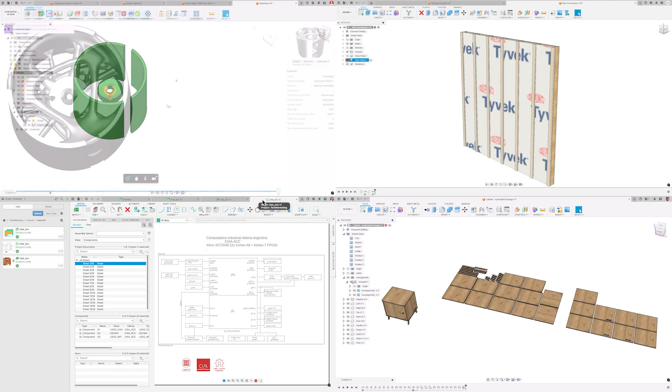Welcome to the What's New in Autodesk Fusion for September video. In this update, we're excited to showcase the latest features and enhancements our team has been working on for the past couple months. Let's dive in and explore what's new.

First up, we've personalized the user experience based on your intent of using the product. You can choose from 3 core personas: design, ECAD, or manufacturing. Each of these provides tailored recommendations for tasks that are related to that specific role. This empowers new users with ways to work smarter and achieve their goals faster.

Let your eyeballs rejoice! We've heard your feedback and have made it bearable to launch your favorite design and make tool for those late nights when inspiration suddenly strikes. We'll admit, the previous loading screen was a bit intense, but we see you, and your eyes will see better as well with the new launch experience.

The active design and hub names are now displayed in the application title bar, which is visible while the application is active, as well as in the taskbar preview. This makes it easier to know you're working on the right data for the right teams.

For those participating in our Insider program, the application now has a dedicated splash screen, title bar, loading screen, login, and icon. This makes it easier to distinguish between each version and quickly switch between testing and production environments.

Next up, data and collaboration. You likely work in teams, so getting everyone on the same page is critical. We've added some great functionality in this area to streamline the product development process and help make better decisions faster. Here are a few of our favorite highlights.

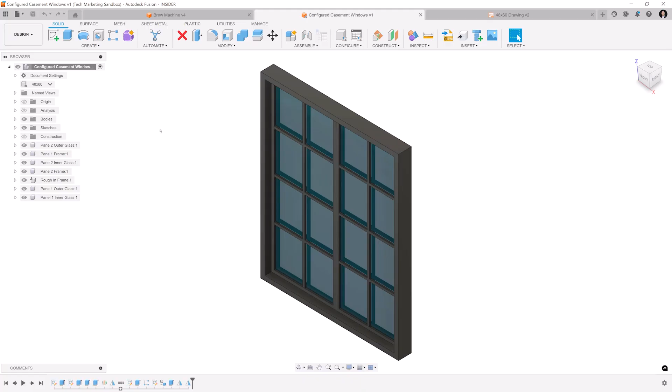In the design and drawing workspaces, users can now navigate to the project and folder location of the design or drawing in the data panel. When right-clicking on a design or drawing in the design or drawing tree, the Show in Location option has been added and opens the data panel, then navigates the user to the file location within the project of the folder structure. This will greatly save time finding data for projects that have a lot of components and files.

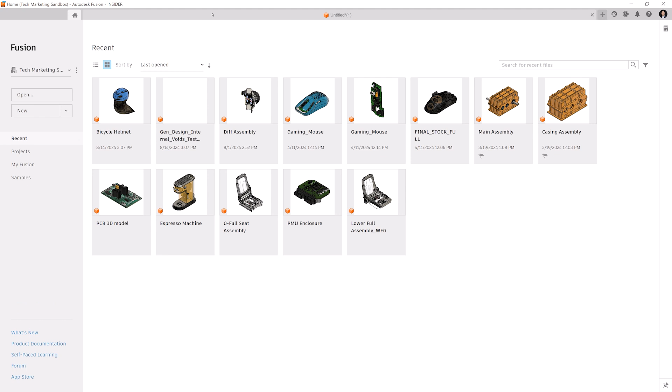In the Fusion Home tab, the user experience for handling file, folder, and project-related actions has been improved. It now takes into account the permissions of the user within a certain project and folder, and then shows only the available commands while keeping the others grayed out. When hovering over an unavailable action, the user is notified about the lack of permissions and to reach out to the administrator to adjust their role. This enhances security and makes collaboration more transparent.

Autodesk has been making some changes to the way we manage cloud data so that your projects will support future updates to your Fusion Hub. As a reminder, you can upgrade your Fusion single-user storage to take advantage of a fully featured Fusion Hub. You can initiate the upgrade process now by self-selecting the self-start process in Fusion. You'll be guided through a required in-product upgrade at a later date.

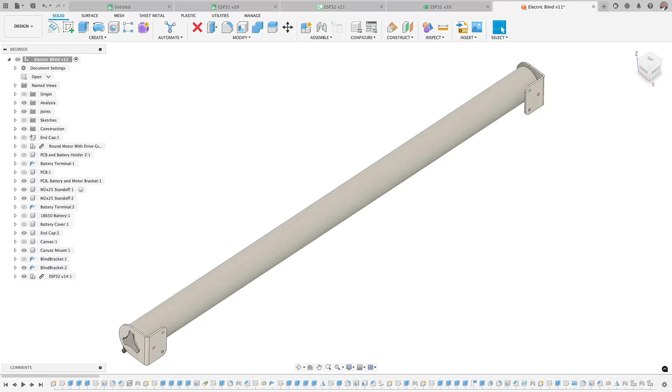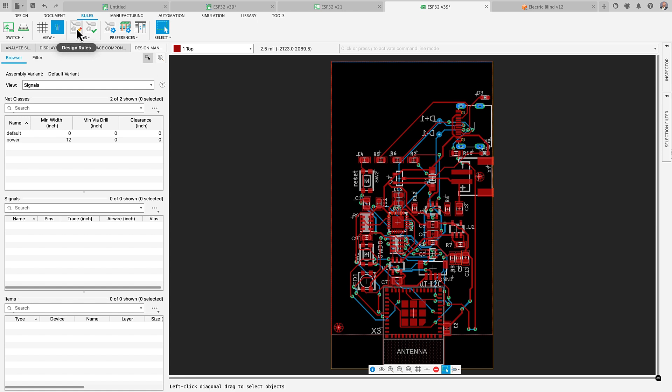The Fusion Electronics Workspace has introduced a new dimension to defining design constraints by empowering you with a wide range of scoped rules. For this work, instead of having a single global design rule preference, we have now divided it into 2 distinct categories: design preference and design rules. If you currently have DRC parameters in your current designs, don't worry, they are fully compatible with our new technique.

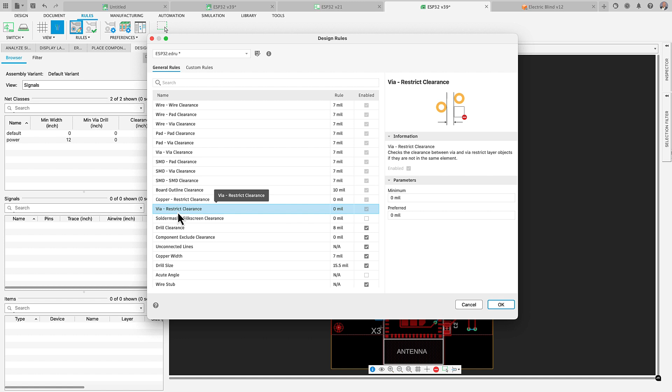Design preference will continue providing you access to global rules such as layer stackup, layer material and dielectric properties, annular ring values, and much more. Design rules will now offer you scoped capabilities. That way, you will be more in control of constraints on your board design. Notice that we have more general rules and custom rules.

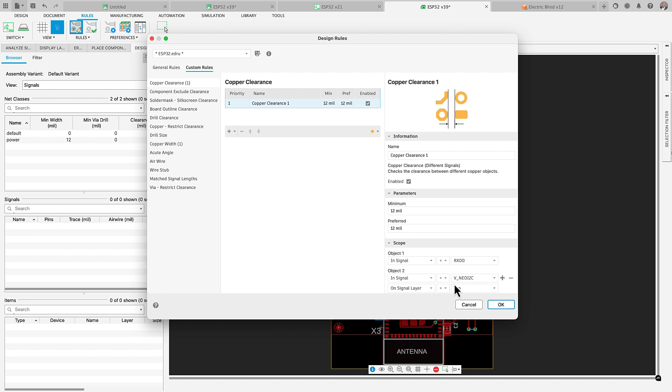In custom rules, you can now set up copper-to-copper clearance for a specific layer, a specific signal, or even better, both. Yes, you can set up a signal to follow my clearance rules on layer 2, which are different from those constraints on layer 1 due to signal integrity concerns. Try it out and discover that there is a lot more. This is more than just a DRC update. It's a game changer for PCB designers, making your work more precise and in control.

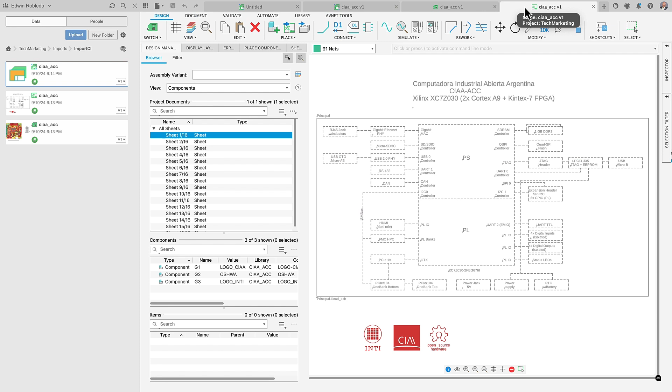We recognize that smooth teamwork is essential for progress, and we're thrilled to introduce our latest update with enhanced importing features. You now have the capability to directly import your electronic schematic files, PCB designs, and library files from KiCad into Fusion. This enables you to seamlessly continue your work from where you left off, but now with the added advantage of utilizing Fusion's comprehensive electromechanical platform, making your design workflow even easier than before.

Starting with this update, you can now import and export user parameters, offering significant benefits to many of our multi-user accounts in particular. This allows you to share valuable parameters between multiple Fusion documents and reduce that non-value added work of creating the common ones each design iteration.

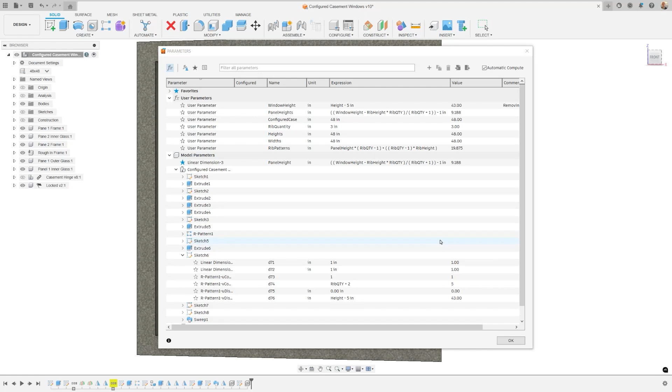Essentially, parameters are stored in an external table that you can import or export, but these parameters are not associatively linked with any specific design. This means that you can easily bring in a set of pre-populated default parameters for use.

When exporting, only user parameters populate this list, and you can edit the exported table using Excel or Notepad if needed. However, it's important to note that any changes to parameter values in the external table will not update existing designs upon re-import. Instead, a new parameter is created with the updated name. Additionally, you have the flexibility to select which parameters from your list you want to import.

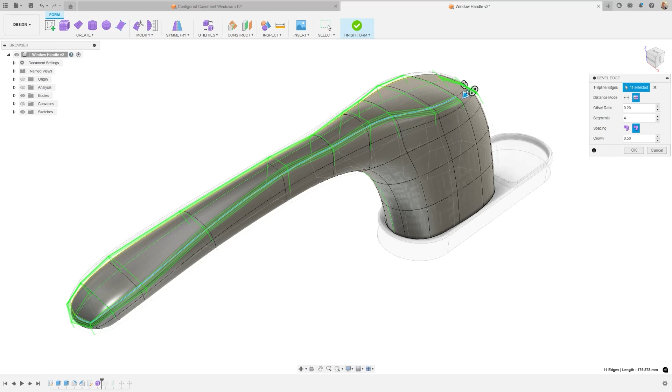This release, we wanted to pay a little attention to the form environment in Fusion. Creating T-splines is an incredible superpower of Fusion that not many people are familiar with. You now have enhanced control over the bevel command, allowing you to better define your component's design. One key improvement is the ability to specify an exact offset distance for the bevel, rather than a relative distance. This ensures a consistent bevel dimension along the entire edge, regardless of the size of the connecting faces.

Additionally, you can now define the crowning of the bevel, with a range from 0 to 2. A value of 0 creates a fully flat chamfer, while increasing the value results in a more convex profile.

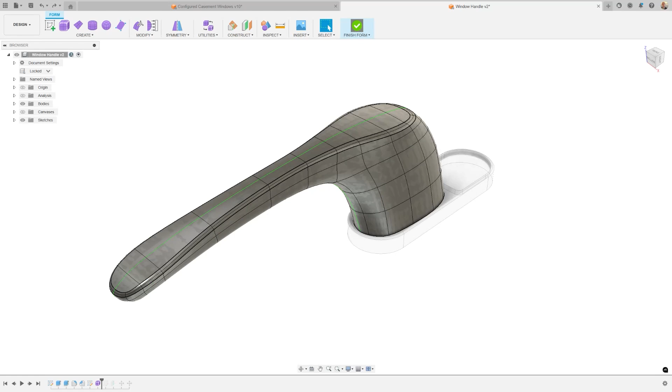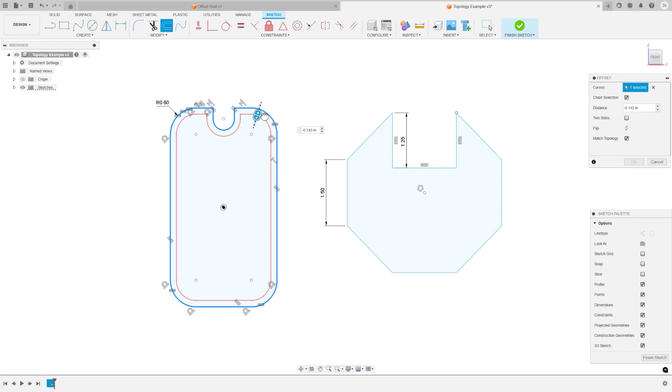We clustered a set of improvements to the offset sketching tool together. The match topology option helps you decide whether the offset created should be forced to match the topology of the parent curve. You can see how the offset limits itself in certain directions if it's unable to maintain curves and corners as expected. Offset now also retains constraints, so if you delete an element of an offset curve, the offset constraint automatically adjusts to maintain its connection to any remaining curves.

The two-sided offset option enables you to apply a two-directional offset from a central line. This makes it easier to create symmetrical designs, but you also have the option to edit those offsets to be asymmetrical later, as each offset behaves as an individual entity, allowing for separate editing or manual linking as needed.

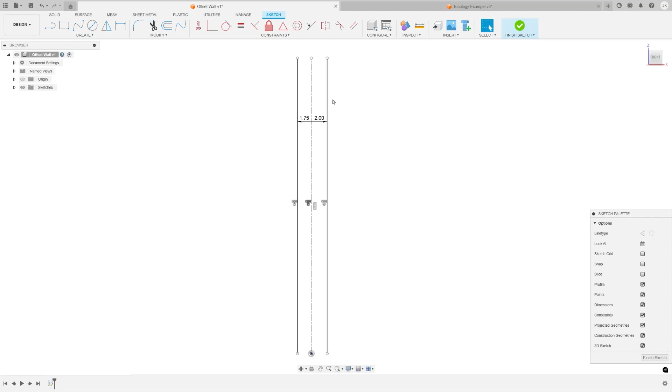The offset of an offset update allows you to create multiple offsets derived from an already offset line, something that previously wasn't possible. I'd also like to note that you should almost always use match topology, as it's dependent on each other, as shown here. This is how I created the set of offset wall component thicknesses that essentially build upon each other.

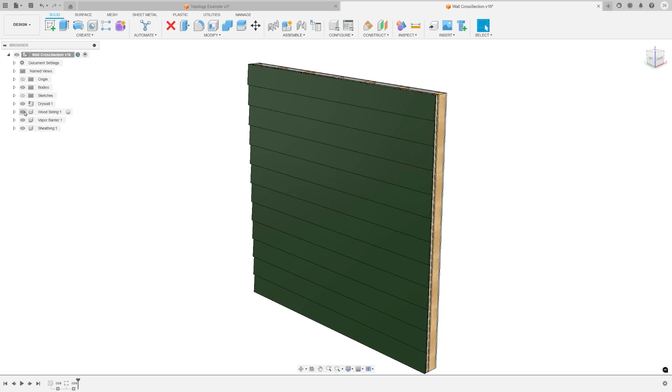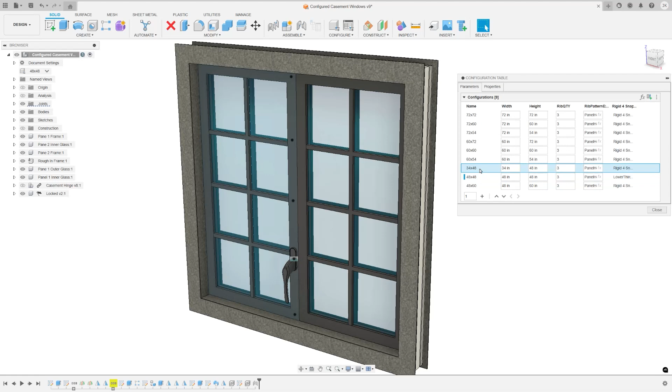Configuring joint snap locations and joint flipping offers you some greater control over the positioning of components in your configured assemblies. Users can now select multiple options for each snap location of a joint and name each option, allowing for flexible configurations such as a single location to many locations, many locations to a single location, and if you're feeling extra crazy, you can do many locations to many locations. We've also put a much requested update on the ability to choose whether a joint is flipped or not for each configuration.

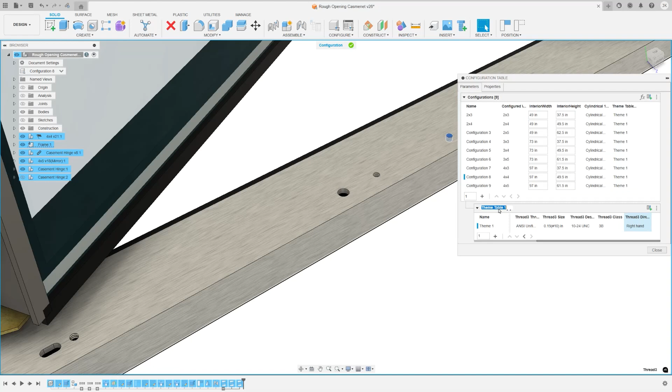Configuring thread features automatically changes the thread dimensions between configurations. This is the foundation for configuring all threads and holes throughout Fusion. For now, you can configure various thread options, including thread type, such as ISO metric, ACME screw, pipe, any of these, thread size, whether the thread is modeled, full length, left or right-handed, thread pitch designation, or class. This feature is particularly useful for creating components that can adapt to standard parts changing sizes, such as an adapter plate that adjusts to match the size of a motor, or for creating a standard part.

We've updated drawing automation once again. This update allows users to set default dimensioning strategies in their drawing templates. When you create or edit a drawing template, you can now choose a default dimensioning strategy for each sheet type in the automation settings. And as an added bonus, delimiter support, which allows users to specify whether a comma or full stop is used as the decimal delimiter in numbers. This feature enables users to customize their drawing settings to align with their own regional standards.

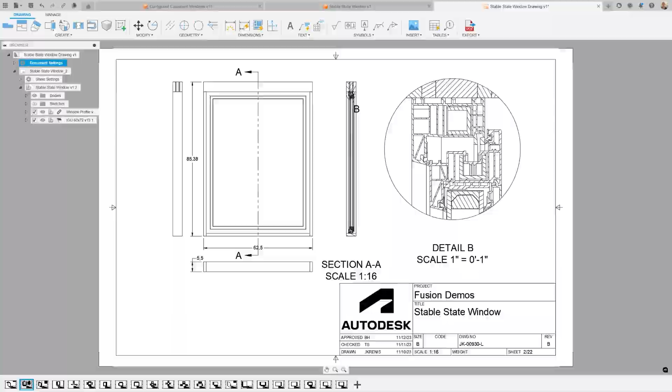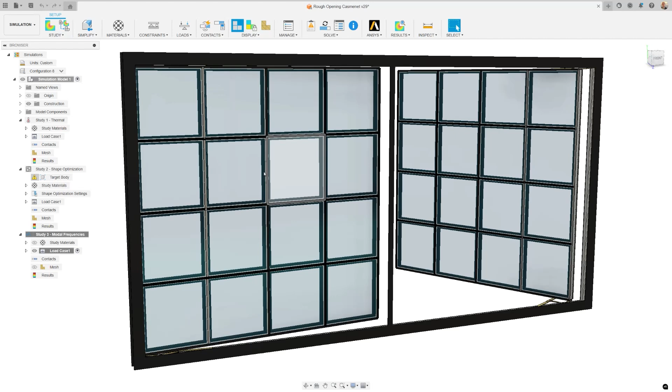We're introducing the new Copy Study feature for configured designs. This enhancement significantly improves configuration support for simulation and generative design, reducing repetitive tasks by allowing users to quickly copy setup information, such as boundary conditions, materials, contacts, and study settings, from one configuration to another. If any setup attributes are incompatible with the destination configuration, then they will be flagged for the user to action upon before running the study.

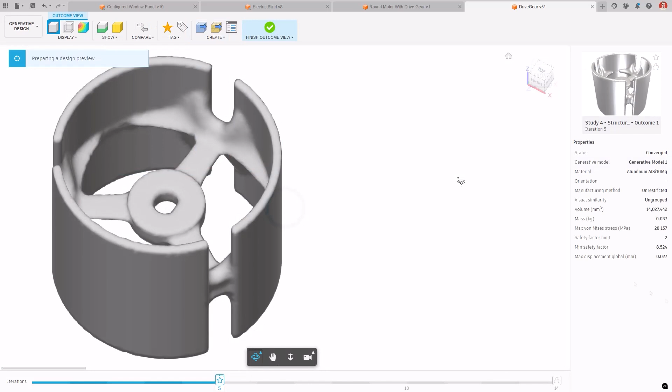Global loads in generative design allow for the support of both angular and linear global loads in your generative design setups. Global load represents forces acting on a mass across the entire study setup. Angular global loads account for forces on a mass undergoing angular acceleration or velocity, while linear global loads are for masses experiencing linear acceleration.

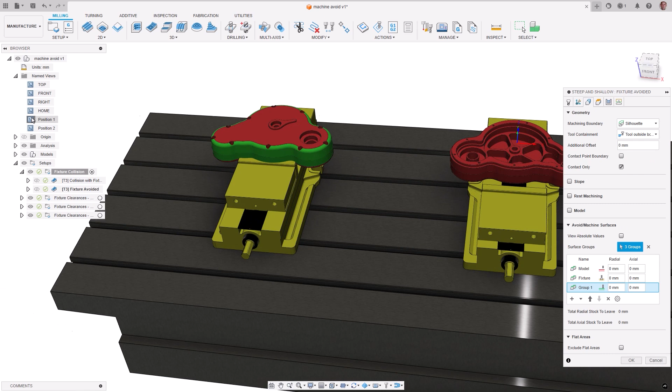Let's start manufacturing with the new Avoid Machine feature, which is my favorite in this release, as it gives more control to how you use surfaces in a toolpath. This replaces the previous Avoid Touch, which only allowed you to touch or avoid, and never at the same time.

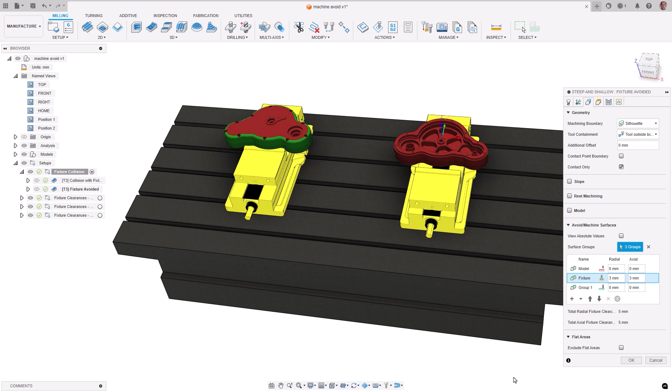This new approach allows you to group sets of surfaces together and apply an action of avoid, machine, gouge, or fixture to each group. Radial and axial clearances can now independently be set for each group as well, giving you even further control. This also aids in the issue of some toolpaths ignoring fixtures defined in the setup. Now, fixtures will be automatically added, marked in yellow, and avoided. Most 3D and multi-axis toolpaths support this new feature, except for rotary pocket, rotary contour, horizontal, and swarf.

Changes have been made to the toolpath dialog, making it easier to navigate by re-establishing the left to right workflow. This improvement will be especially noticed in multi-axis toolpaths, reducing the need to move back and forth across the tabs. The machining type is now available at the top of the first tab and can be set to 3, 4, or 5 axis, allowing you to set your intent up front about how you want to machine a part.

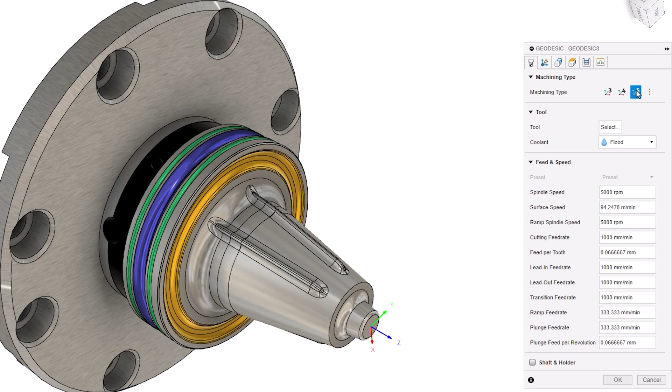The multi-axis tab has been moved to the second tab in the workflow, and additionally, the tool orientation has been moved from the geometry tab into the multi-axis tab. These changes will prevent cases where you must go to a later tab, set parameters, and then return to an earlier tab to make further adjustments, allowing for a more streamlined workflow.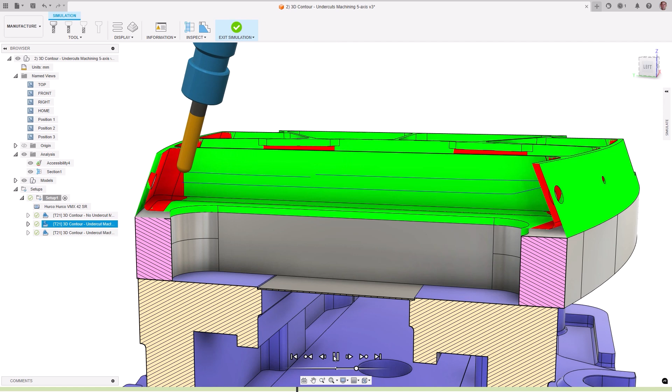The 3D contour toolpath has been enhanced, giving you the ability to now machine undercut regions. This new functionality is not readily apparent, as it is part of collision avoidance. By checking it on, the tool axis is adjusted to allow spherical tools such as a ball or lollipop end mill to reach into the undercut areas. It's worth mentioning that care should be taken when using this with boundaries, as the boundary defined may not entirely encapsulate the undercut area, resulting in a toolpath that is not complete.

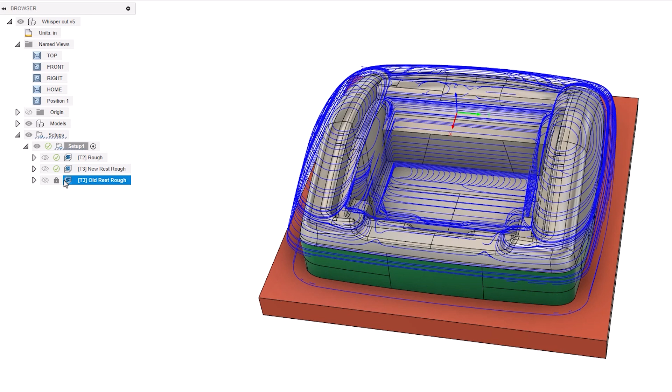Whisper cuts is the term typically used when the tool is cutting little to no material. These cuts not only increase the cycle time, but can also, in certain circumstances, potentially damage the tool. The algorithm for the 3D adaptive clearing toolpath has been enhanced to better identify and reduce these unnecessary cuts, leading to improved rest roughing toolpaths, which not only save you machining time, but are also safer for the tool.

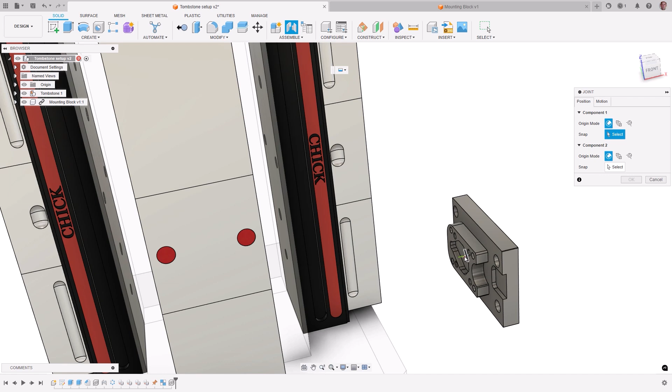CAM data previously was not accessible in a linked design that was imported, which meant that it was not possible to create an assembly of CAM programs. For example, to position a part in a vise or to combine pre-programmed parts together on a multi-part fixture. This functionality has been improved, allowing you to now reuse CAM setups and operations from linked designs.

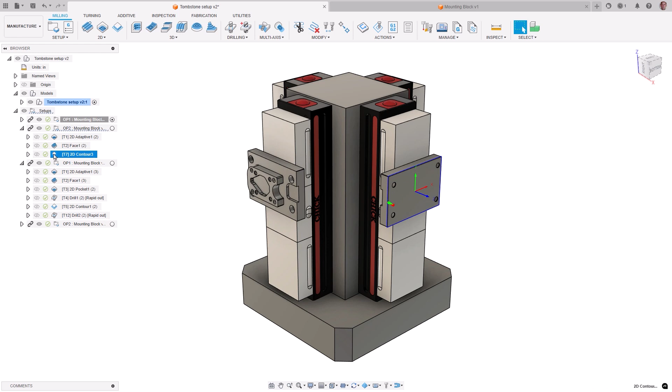The imported CAM data is read-only, but edits can be made to the workpiece coordinate system or tool orientation to refine how the toolpaths are applied to the new assembly. Setups or operations which are not required can be suppressed, and you can also break the link on the setups to gain full control of all toolpath modifications.

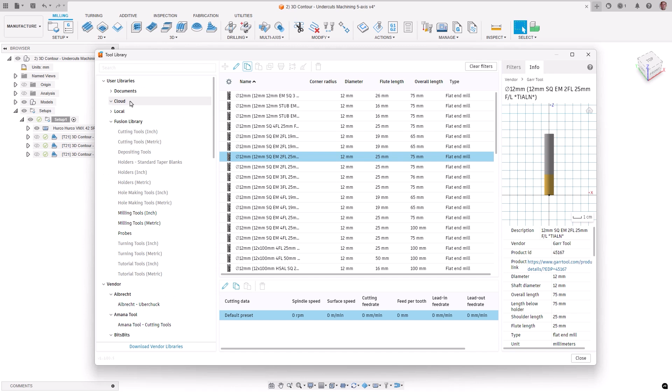Vendor tool libraries are now integrated into the tool library interface. Streaming from an online repository, this removes the need to download them and puts up-to-date tooling right at your fingertips. Tooling is read-only when viewing them, but you can select, drag, or copy the tools or holders from the vendor libraries to your own cloud, local, or document library and edit them as needed.

The thread tool definition has been enhanced to increase accuracy. With these changes, the inner diameter now automatically calculates based on the thread profile angle, thread pitch, and diameter parameters. The behavior of the thread profile angle parameter has also been changed, so that it now describes the thread's inclusive angle more intuitively.

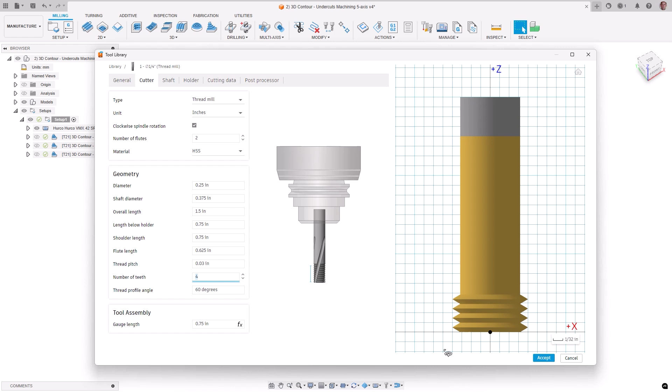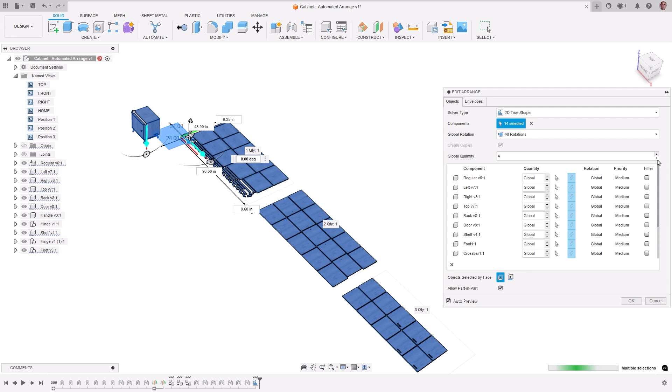We're excited to announce Automated Arrange, which brings significant improvements to the Arrange feature. Part-in-part arrangements are now available to improve material usage, along with the option to create copies or move original components. Arrangement nodes are created in the browser tree, with selections cross-highlighting across objects in the browser, canvas, and timeline, making it easier to see what's being arranged. Multiple manufacturing setups can be created directly from arrangements, enhancing associativity between model, arrangements, setups, and toolpaths.

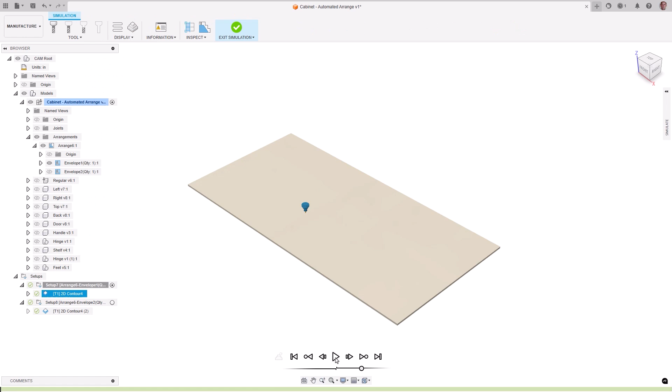Manufacturing extension users see enhancements as well, with a global value of part quantity control, multi-edit capability, the ability to apply individual overrides, grain, and orientation, as well as multiple envelopes along with filler part settings to maximize material utilization.

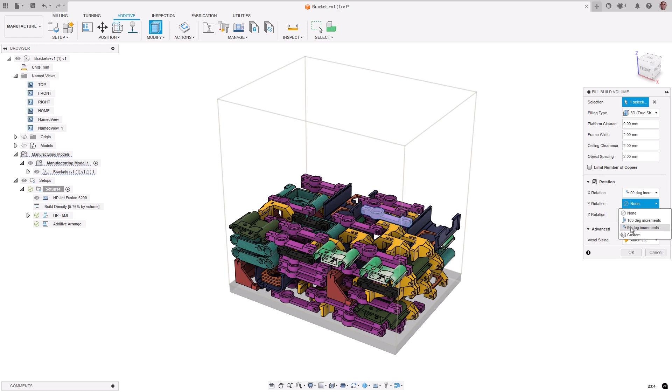The Fill Build Volume tool helps you fill the unused space in an additive machine's build volume with multiple copies of a part to maximize production capacity. This now includes a new filling type called 3D True Shape, which will consider the actual true shape of all components instead of their bounding boxes, resulting in more parts being added to the empty volume. This new filling type also allows you to consider different part orientations by rotating the part around its X, Y, or Z axis, arranging parts in various orientations to make better use of the full build volume.